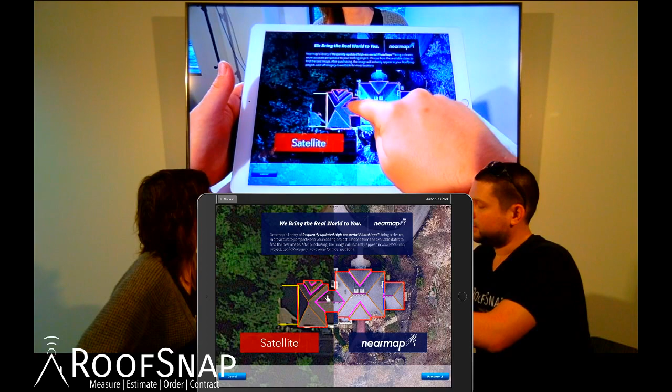But I want to draw your attention here: this on the left is from satellite imagery, this on the right is from Nearmap. When we draw from satellite imagery, sometimes we have difficulty seeing the edges — you can see the distortion here because the lines aren't straight, since the roof wasn't captured from directly overhead. Whereas in Nearmap, it's nice and straight over here on the right. It's a much easier roof from which to make accurate measurements.

For sure. So let's go ahead and commit to a $5 purchase for the Nearmap. I think that's worth it.

And Katrina, you'll have to project today because we're not as close to the microphone as we typically are.

I'm a little more soft-spoken. You have to give it the... you know what I'm talking about, right from the diaphragm. Horrible. Yeah, yep. Oh, I know. I don't know if anybody's gonna get that.

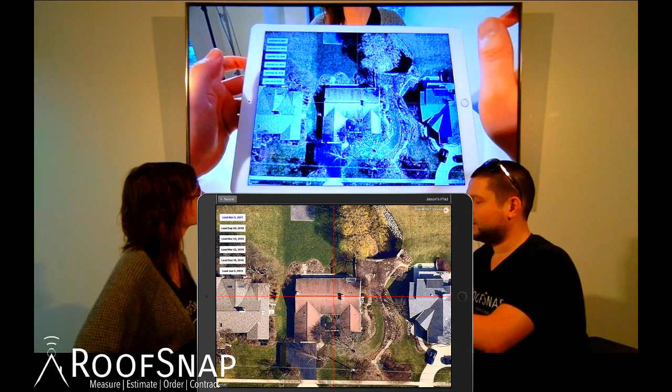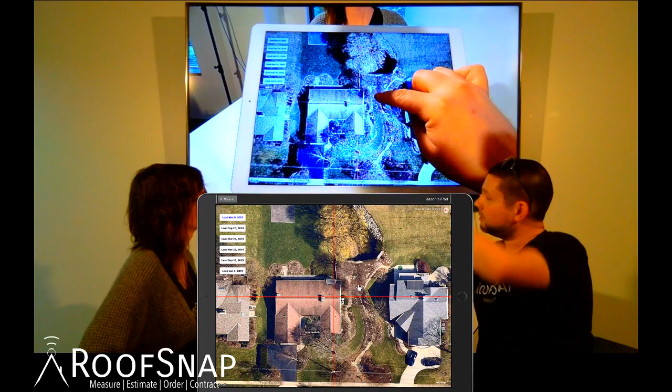So we had success in purchasing the Nearmap image. Now we can make sure we're zoomed in all the way and get nice and straight on the ridge. But this image, if I line it up here on that up and down red line, which may or may not be visible on the flat screen, but you should be able to see it there on that screen down there. I'm going to have to get used to this.

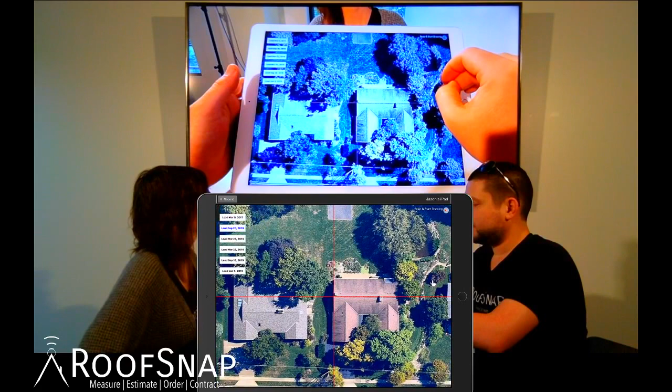Let's change and load in the September 20th image and see how that one appears. The goal here is not to see the siding on the wall there. You want to see the rakes being straight. You notice here that the rakes are pretty straight. We don't have that curvature, which tells us it's more directly overhead. But we still have trees covering this area on the back and some strong shadows.

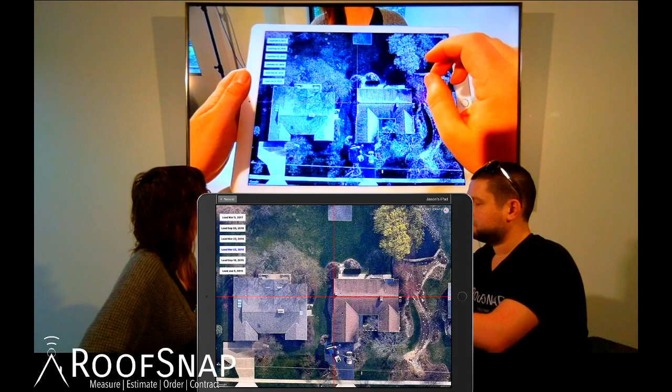So let's go to March 23rd, and that is a much clearer image. The rakes are very close to straight, which is going to give us the most accuracy. If the rakes aren't perfect, it's okay, we can still use it to draw. We just want the best of the best, the best image possible. And that's what you get with Nearmap.

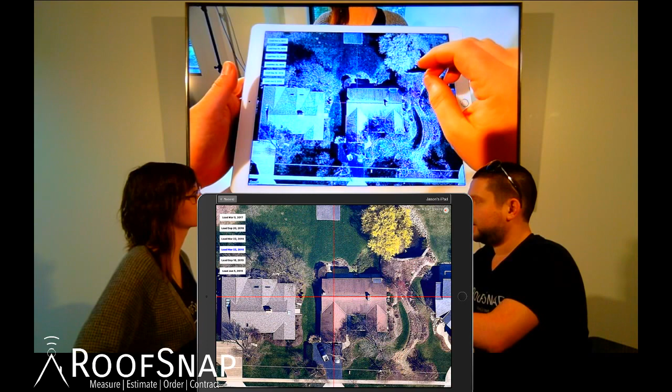Options to find the best, and I like this one so much, I don't even think I'm going to spend time looking for a better image. But you notice here, I'm lining up my horizontal line on the ridge and my vertical line on the other ridge, making it nice and straight, bringing it back to center.

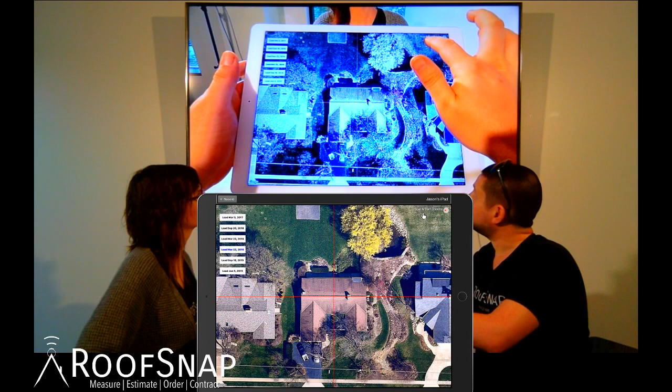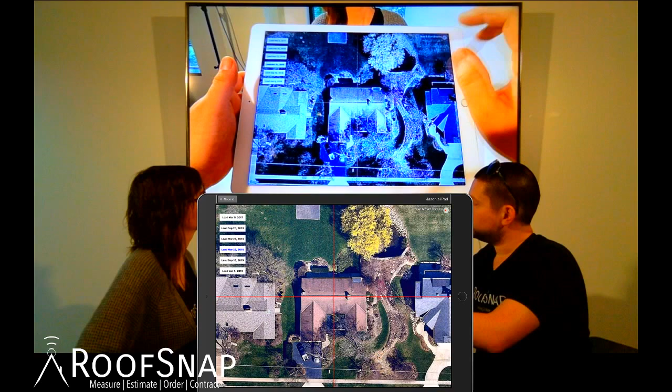Two fingers to zoom in all the way, which I already am. Snap and start drawing. Tap on that in the upper right hand corner, and for this section let's just bring it down a little bit. Still bright, still really bright. Go ahead and tap on snap and start drawing and then continue. And what this does is it loads up that image directly into our sketching functionality.

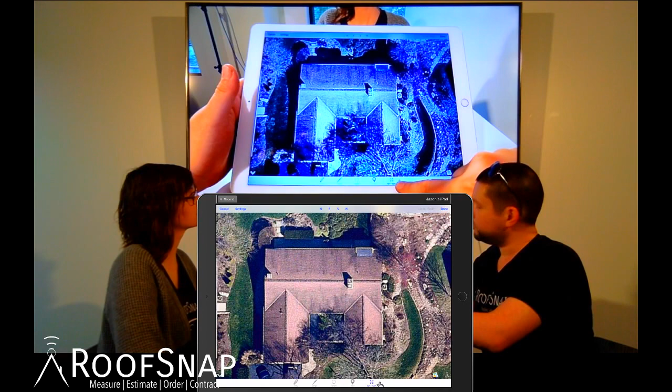Our sketch tools all appear here along the bottom of the screen: draw, edges, facets, pins, and pan and zoom. You'll find that I tap on pan and zoom a lot just to move the image around on the screen. Kind of like to be zoomed in, it's easier to draw more accurately.

To lay down my first line, I'm going to tap on the draw button here on the far left. I'm right-handed, so I'm going to use my index finger here on the screen. When I touch the screen, it puts a cursor on the screen. So I'm going to come over here and put my cursor right in the corner, and then with this little thumb right here, I'm just going to tap right on the screen, like a mouse click. It turns my cursor green, and then I can draw out my first line.

I'm actually going to draw that one to about there, and you'll see why. I actually drew the line, and then I tapped on the screen when I reached the end. Now I don't need that little line I just drew, that was just for an example, so let's tap the undo button here.

Now let's move this over with the pan and zoom down here in the bottom right toolbar. Switch back to draw, put my finger where that point is, and then in order to start my next line I have to tap. So there you see I tapped on the screen. Bring the line up, and I want to end the line there, so I tap on the screen again. And now I've drawn two lines.

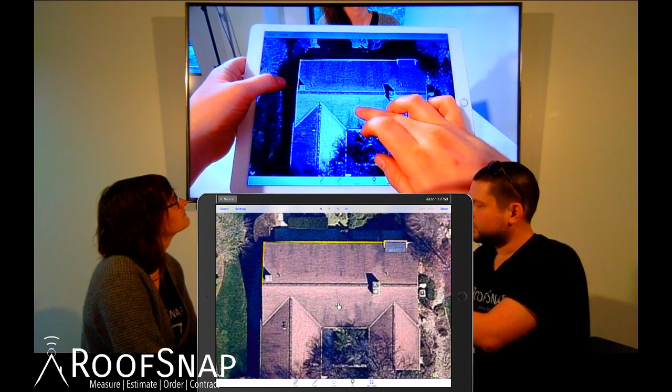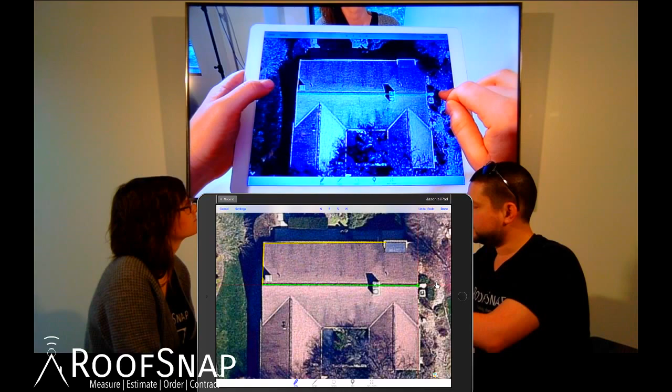Now we don't have to stop after every single line, so let me draw a few lines in a row. First of all, let's draw out that ridge line. I'm going to bring it to the end, and I am going to tap on the screen there.

Now let's draw three lines in a row. I'm going to start right here, tap to start, come down right to where the bottom of the valley is, tap to set that line, and then come up the valley. I didn't pick up my finger at all, I just continued to draw. Tap again to come down the other valley, right to about the center of the gutters.

That's what I find to be the most accurate. So we drew those 3 lines. Now we can pan and zoom and move it around. You see I just touched it - I do it sometimes so quickly, even with other fingers. It's a multi-gesture environment here.

So now let's put our finger right up here to set the cursor at the top, where these 2 valleys meet this ridge, and come down the ridge. Jason, when he's drawing a line and starting his cursor out, he kind of quick taps to connect to that point. He's already landed there, and he'll just kind of tap and turn. I'm going to tap and turn, and I don't pick up my drawing finger. Now we see this one goes past.

There's a funny little detail here. You can see this when you're on site more easily than from an overhead image. But for any of you who've drawn as many roofs as I have, whether on graph paper or in some software, you know this has a little overhang and a little piece of flashing there. It kind of comes into a little pocket, so we'll connect it into that pocket with a line. Straighten this one out - that's something we haven't talked about yet.

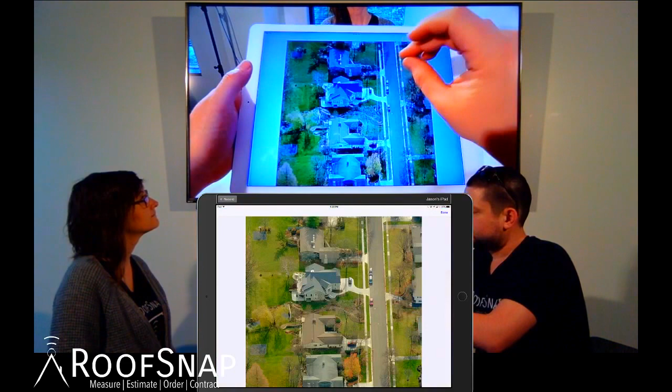There's the house. We're going to have to be on a lookout for this little flat section back here - do you see that? Yeah, interesting. East. South - there's another view of it there. Here we're also looking for any sort of bay windows or other difficult to see, wraparound, small sections, stuff like that - things from a bird's eye view that you can't necessarily pick up straight from that aerial view.

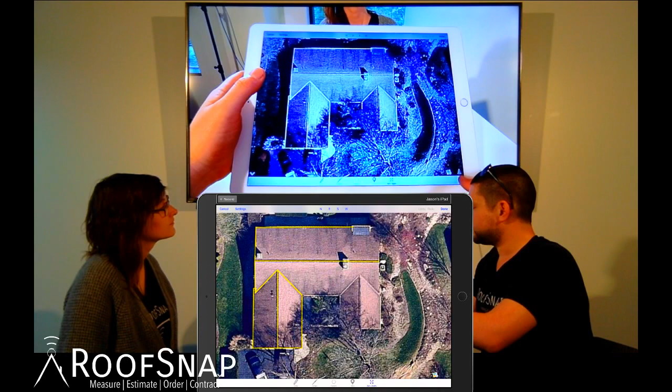We've looked through those. Now let me draw your attention down here to the bottom right corner. I want you to see there's a little map icon and a little man with a circle around his feet. Let's start with the little man with the circle around his feet - that's going to open up Google Street View imagery.

Yeah, I think it's that one, with the tree right in the front. But good news is there's straight gables on the front of the house - no special little wings or ears. We have a pretty straight on image. You guys notice how I've gotten the gable pretty much straight.

If I put it right in the middle of the screen, it feels like it's a little at an angle, right? A little crooked. If I move it over here, it feels like it's pretty straight, just off center. Notice this little icon up here in the upper left-hand corner - this is a little pitch card. Let's tap on that and tap on continue.

Now I'm going to take two fingers, and here's where it's interesting to be able to see my hands - I'm going to just take it and pinch it open, making it a little bigger. Once I've changed the size of it, now with one finger I can move this card around. I can put the 4/12 right on the roof, and that looks like it's going to be a 4/12. The 5/12 is too steep, so that's good to know. We've got a 4/12 pitch, at least on that section of the roof.

We can also move over a little bit.

Move over again. Oh, too far. So we're not going to be able to get as straight on this one over here on the right.

If you're at an angle and you're using the pitch tool, same thing, zoom it in a little bit and bring it down. It's pretty much right on 4/12 still. Even though we are at a slight angle, it's still showing us an accurate measurement there.

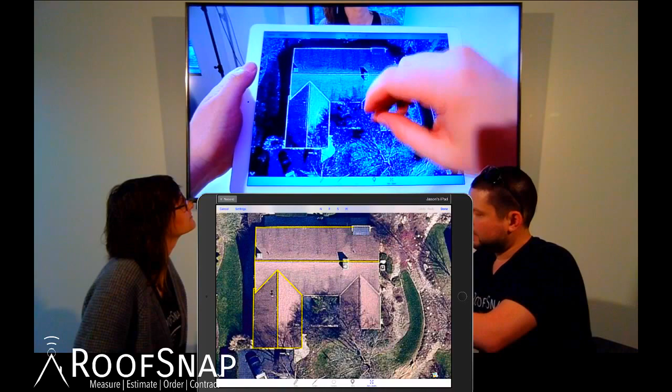All right, let's close out of Street View. Now I can draw the rest of the lines, but let's not forget, we know the pitches on these front sections. Now we'll finish drawing out the rest of these lines on the roof. Same deal here, every time I come to the start of a line or draw a consecutive line, I've got to tap on the screen.

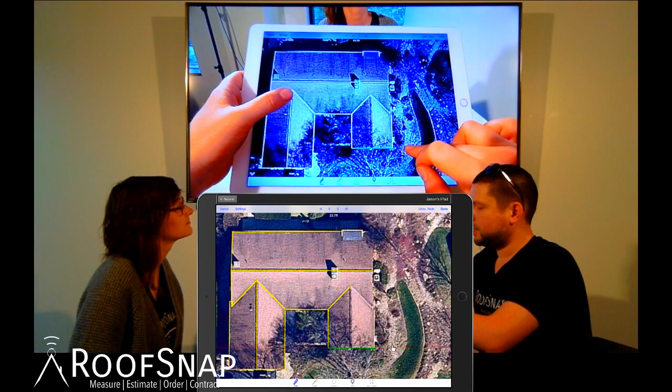Let me show you guys what not to do. A lot of people want to come down to the bottom of an eave, and then when they want to go across a rake, they'll draw all the way across the rake. Now if I do that, I have no place here to connect my ridge. If I go all the way across, I will not have an accurate drawing, and I will not close in my facets correctly. So what I want to do is just go halfway.

Use my cursor tail to know where the line's going to go up the roof. Make sure it's straight, tap, change direction. Haven't taken my drawing finger off in three lines now. Even going to come down this side, still haven't taken my finger off the line. Now I can make sure that this is level by using my horizontal cursor tail and seeing that it's equal to that gutter in the middle section there.

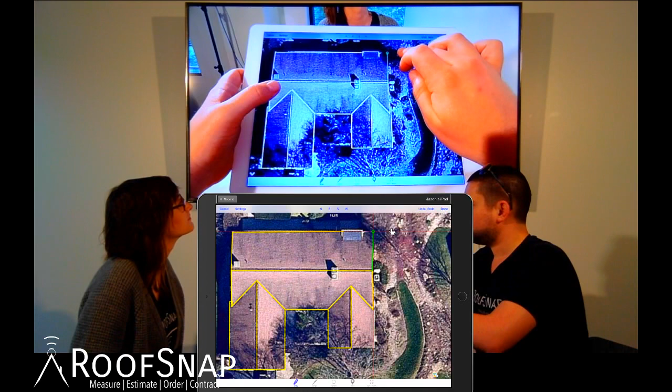Tap and come up. Now here I'm going to tap and keep going and draw another line out here. But I'm going to stop here and zoom in. I don't want to try to draw this section without zooming in a little further. Might as well just go ahead and take care of this while I'm here.

Sounds good. So we come down the rake, tap, don't forget to tap. What happens if you don't tap and you lift your finger up? Oh, you lose your line. Yeah, let's do it again.

So here, if I just draw and I think I'm there, but I forget to tap and I take my finger off the screen, it's going to stay there. See, fingers are off the screen, it's there. But as soon as I touch the screen again, that line disappears. You have to tap to lock it in, otherwise the line disappears.

The reason it stays there, I guess, is just to make sure the crosshairs are lined up with what you're doing. If you're just trying to set a point, just to see if something's level, you want the crosshair to stay there so you can see, and you take your hands out of the way. That's why we let the crosshairs stay up there on the screen when you take your finger off.

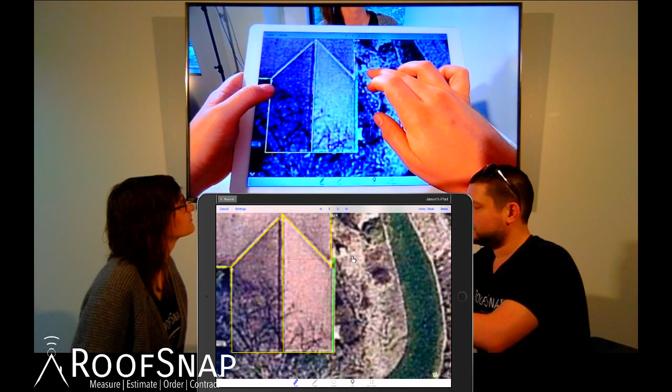So let's go ahead and draw it past, bring it over. I'm definitely going to want to zoom in on this section here, because again, we've got a little bit of overhang, a little bit of a pocket that comes down, and I'm going to connect it right there.

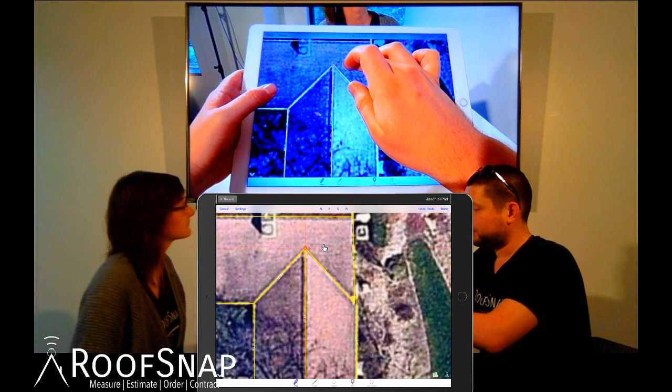Our roof measuring functionality is extremely accurate by actually just drawing the lines that are literally there on the roof. What I mean by that is you don't have to draw double lines to close in different areas. You don't have to draw the ridge twice, one for the front and once again for the back.

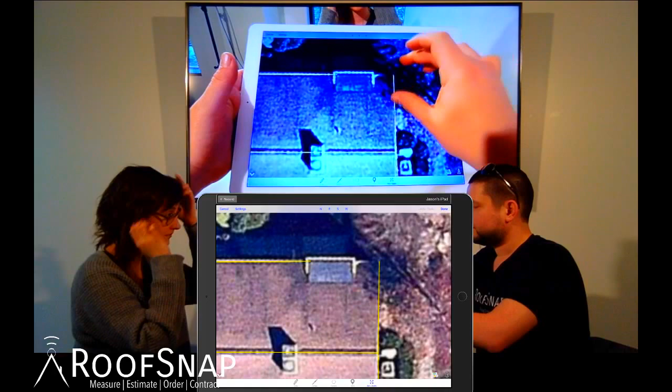So here, first line I am confident about is the pitch change from the regular slope to the low slope. I'm going to draw to the center of the gutter, come up here, come across the center of the front of the gutter, line up with my cursor tail to make sure it's nice and straight, come down, connect it. Now that I'm connected, I can tap, take my finger away.

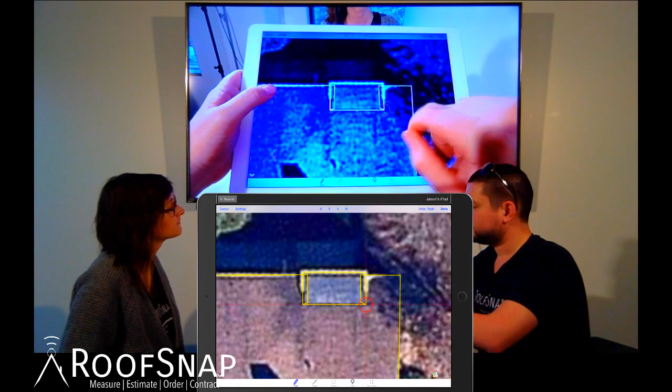Now let me show you guys something here. This is a lower section as there's an underhang.

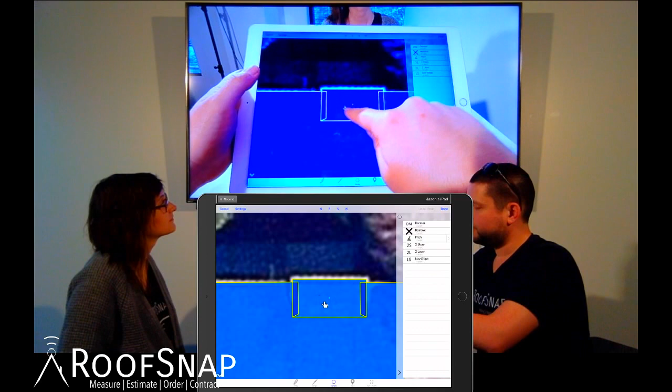This is a lower section here as there's an underhang, and a pitch change that goes from the big section down to the lower section. When I switch to facets, we're going to see the 0 for the smaller facet here, and these darker shaded areas represent material not only for above and for below.

But let's say this low slope section here is not getting any shingles. That's what we mean by low slope - it means alternative roofing system. You're not doing shingles, you're putting rubber on it or some other modified system. Label that as low slope. Maybe it has a 2 in 12 pitch, or maybe it has a 1 in 12 pitch.

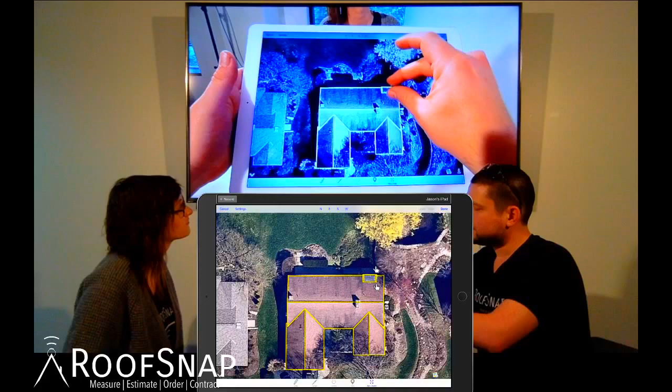Now let's do pitch, but let's do it in slow motion. So we addressed some of the facet labels, but pitch is a facet label. When we show the whole roof here, pan and zoom to go to the whole roof, and switch to facets, you'll see that everything starts with 0.

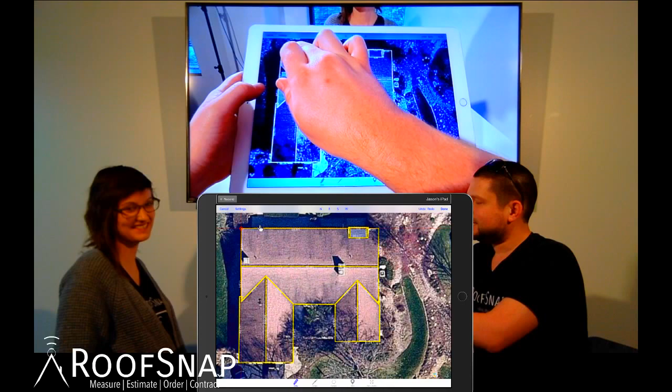And of course, while I'm in here, I see a line that's not ever so straight, so of course I have to fix it. It's my OCD or my ADD or my UDF. That's where I get gas, guys. I have a UDF card and an ADD card. Do you? I can't tell.

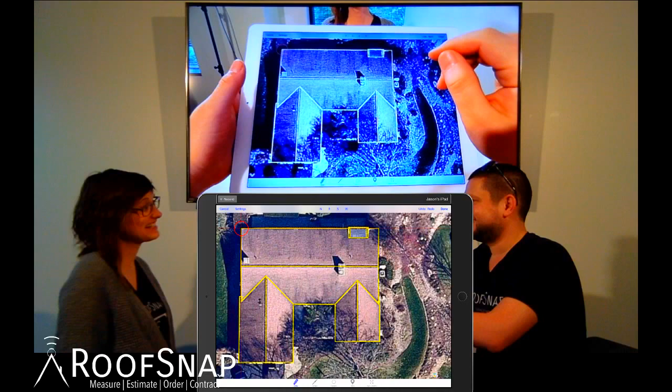Facets button - to look at facets, to change facets, tap on the facets button here at the bottom. And then go and tap on pitch. Select your pitch - pretty sure everything's going to be a 4 in 12. Tap on apply to all.

Put 4 in 12 on everything. Let's say these front areas were not 4 - let's say they were 5, but everything else was 4. Go back to pitch, select 5. Now just tap on the 4, it toggles it to 0, tap on it again, makes it 5. Touch on the other one, makes it 0. Touch on the other one again, makes it 5.

Want to remove a section that you're not changing the roof of? Use the remove button - you can turn off facets altogether. It can also show you that this 4 doesn't apply to this section here. How do we know? Let's remove it for a second, turn it off - well, that section's still highlighted. Tap on the little X that is left behind once, getting tap happy there.

If you've got a dormer on the roof, label both or all the facets of the dormer as dormer.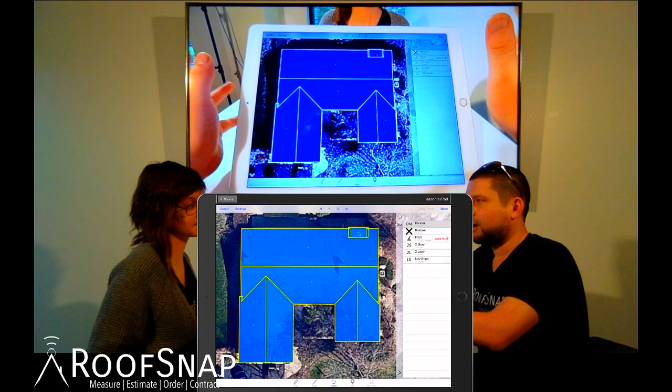If there's 2-story and you want to add that label so that your estimating platform within RoofSnap knows to charge extra for 2-story. Same thing with multiple layers - you can add 2 layer to any facet. Of course, you're not going to be able to do that from the office. You're going to have to add second story, or excuse me, multiple layer once you're on site and you've actually checked to see if there's multiple layers.

Every time I lean in too far, my face goes behind the other iPad, so I'm like, hey.

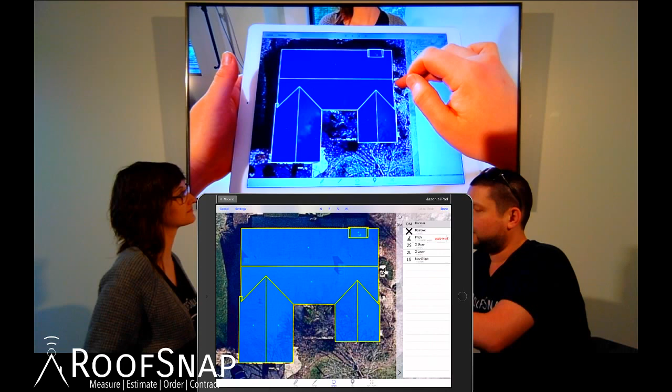All right, so that's pretty much got the facets taken care of. Now, one of the things that the software doesn't know yet are all the lengths of all the lines. Here's why - this is an eave, 21.3 feet. Not sure if you can see that it says 21.3. As soon as I change it to eave, it stays 21.3. Why does it not get any longer? There's no slope that it's going up or running down.

Couldn't have said it better. Won't even try to say it better.

Rakes, however, they don't travel horizontally. Rakes travel diagonally, they go up the slope. So this one here is 11.5. Right now it doesn't know that it's a rake, it just thinks that it's a line. As soon as we call it a rake - 12.4, this one's 11.2, 12.1. As soon as we touch it, it gets longer.

You have to label all your lines. If you don't label all your lines, you will not get accurate measurements, line measurements. You might come pretty close on squares, and so if all you need is squares, then you're good. But if you need to know how much starter, how much hip and ridge - hips, perfect example. Except that we don't have any hips on this roof. But valleys...

Valleys are very similar. Now let's touch on valleys the second time. So when we first tap on valley, it highlights it, loads it up here into this little sidebar. But if we tap on valleys a second time, you'll see we've got another label, sort of hidden, a sub-label underneath the valleys. We can add ice and water shield. When I tap on it, it highlighted it, ice and water shield. Now we're going to be accounting for ice and water shield in all those valleys.

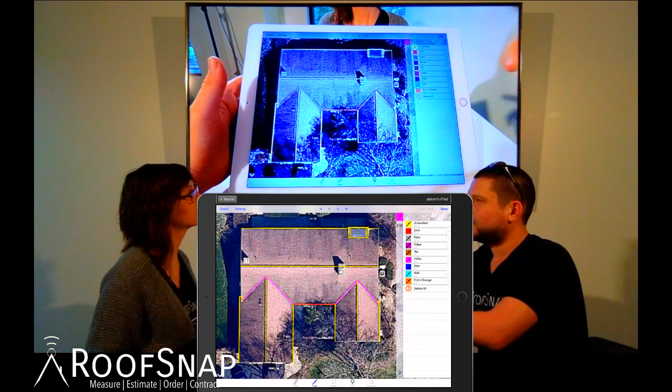But let's say we also needed ice and water shield at the eaves. Let's get a running total going. So let's go to eaves, go back. Let's add ice and water shield.

Let's also add eave edge. Eave edge is going to make a running total for things like starter, edge vent, and drip edge metal. It's not about one product, it's about a category measurement that gives measurements to lots of different products when we start estimating in RoofSnap. So I want all the eaves.

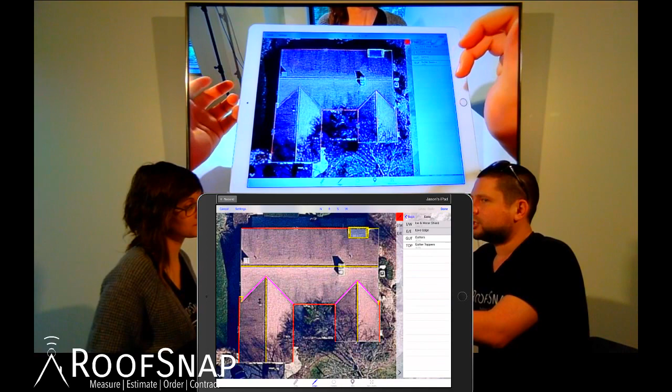Do I want the eave on that low slope section? Well, I ask myself, am I going to put ice and water shield along that low slope? No. Am I going to use the same style of metal flashing along that low slope section? Possibly not. I might be using like a D7 or some other heavier duty drip edge flashing along a low slope, something that correlates with a special edge to go up under the rubber. So let's not label that one as an eave, because it's not getting all the same measurement or the same products that all the other eaves are getting.

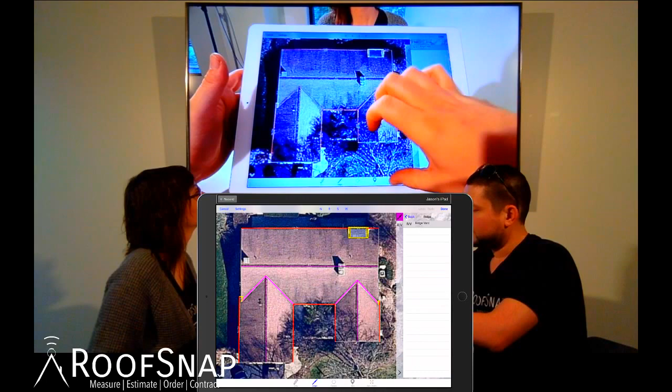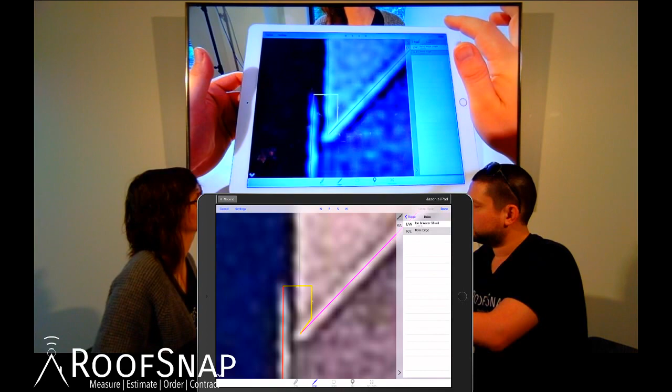Ridge, well, we do have one label, sub-label under ridge. It's called ridge vent. Let's tap on that, load it in, and zoom in on this little section here, because what do we have here? A rake. Do we put metal on our rakes? We didn't, we left those blank. Let's add it in.

And then there's going to be a little wall. So what do we have under wall? More ice and water shield and more apron flashing. So let's get some ice and water shield there. I like to throw on a lot of labels.

You notice here though on these two rakes on the front, I didn't put in rake edge, which means I didn't count for a measurement that's going to give me measurements for my drip edge along my rake. So I went ahead and tapped those, and you can see the little sub-label R/E showed up.

Can you see that? Yeah, I see it. All right, well, I'm hoping they can see it. That's why we have two screens going, above and below.

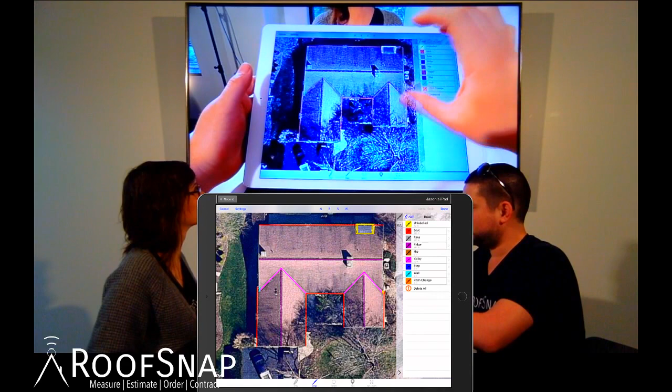Oh Katrina, I can see your neck. Hey! Lots of cameras running today, definitely not used to what I'm looking at, where I'm looking. I've got a rogue gnat, a rogue little fruit fly. That time of year, doesn't matter how many times they clean the office, we always have these little tiny baby fruit flies. Well, I don't know if they're babies, I imagine they don't live very long.

And since you've already selected ice and water shield and apron on your wall, go back. It's already there, it remembers. It's a nice little memory feature. I keep switching to pan and zoom a lot. Every time I switch to pan and zoom, it brings me back so I can come to a new location of the roof and really zoom in on it.

For some of you who put ice and water shield at pitch changes, that is an option. So we can tap and label, you see the word ice. Ice is going to appear wherever ice and water shield is being labeled. That doesn't mean you're limited to one ice and water shield product, though.

When you set up your account, you could have a generic version, you could have a GAF brand, you could have a TAMKO, you could have an Owens Corning. You could have 9 different ice and water shield products. This is just giving you the number of feet where it's going to be installed, just in case any of you were curious.

Step. We've got a little bit of step here, so let's tap on that. Let's add step flashing and ice and water shield.

Now, the same sort of problem applies here on these rakes. Do we label them rakes or do we not label them rakes? Well, it depends. Are we going to use the same type of flashing on this low slope section as we are for the rest of the roof? If we are, then yes, we would label them rakes. If we're not, we won't. So I'm going to leave those yellow for right now, since in a sense it's a separate roof installation altogether.

Some companies might even have a separate crew come the day before or the day after the rest of the roof is done and just lay the rubber for that last section, or the TPO, or whatever type of material is going on there. Some companies, however, have crews who will do all of it while they're there on site.

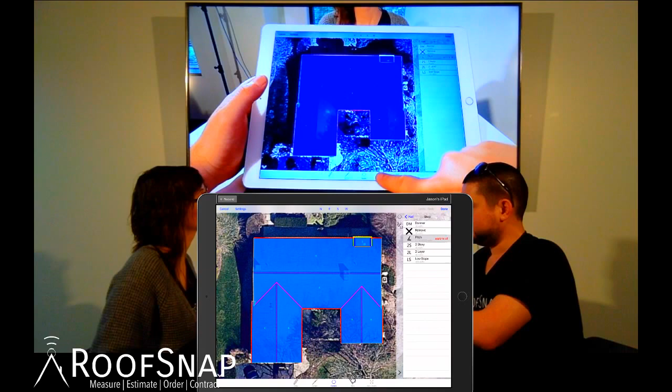All right, so we've got one more label down here, pins. Pins can come in handy if you're estimating, but they also come in handy when you're inspecting. And today, Katrina's going to get her picture taken. Oh great, we are going to make Katrina an attention area.

Better than hail damage. Better than leak area. Shingle defect? No, she's an attention area. All right, I'll do the attention area.

There's the attention area pin. You see what I did? I tapped on the attention area, and when I did that, it loaded it here into this little sidebar, and then I tapped right on the section of the roof where the attention area is going to be. Oh, I didn't tell them how to do that - sliding my drawer in and out. That's right, see guys, how I can just touch right on that little gray bar and I can move that drawer in and out. Okay, let's not get sidetracked.

So I've got the pin. Now I press and hold on the pin, and it says delete pin, so that's one option. Choose image from my photos library if I already have one uploaded, take photo - that's what I want to do - or edit note.

Well, let's edit the note first. I've got a keyboard here, so I can type. Katrina is great at demos. That's my note for Katrina for today.

Great, I don't have to hit a save button. I can just tap, makes it go away, but that information is there, and that information is going to come back to haunt us later on.

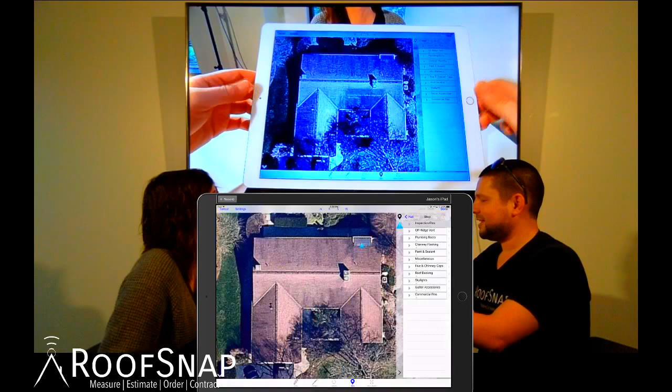Now let's grab some accessories that would also be good for estimating. Plumbing boots - let's tap on the 1 to 3, I see at least 2, maybe 3. If I was on site is when I would actually want to be doing this, confirm the size - maybe they're 4 to 5 inch, not 1 to 3. I'm making guesses here just for demo purposes. You're going to know because you're going to be on site.

Chimney flashing - let's get a large chimney flashing kit, and that looks like a chimney, and that might be a chimney as well. Paint and sealant, we could grab that and actually put 1 tube of NP1 and 1 can of spray paint on.

Miscellaneous - well, there's some cool stuff in here. Comb AC condenser fins, so if there's hail damage and we need it, there's an AC unit right there. Flue and chimney caps if we needed those. Now I'm showing you what we have here in the sample office, but just so you know, you can add lots of other accessories into your pins that can be labeled onto the roof. It's not limited to what we're seeing here, it's completely customizable through your account on the back end.

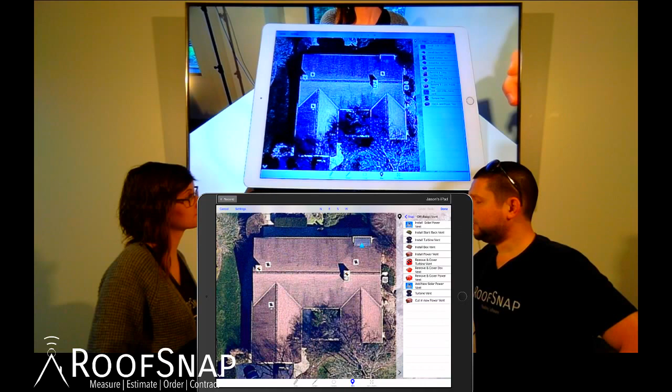We didn't look at off-ridge vents because this house obviously has ridge vent on it - you can tell just by seeing those raised ridges in this high-res Nearmap image. But if you needed to add a solar vent or some box vents, you could pin those on as well.

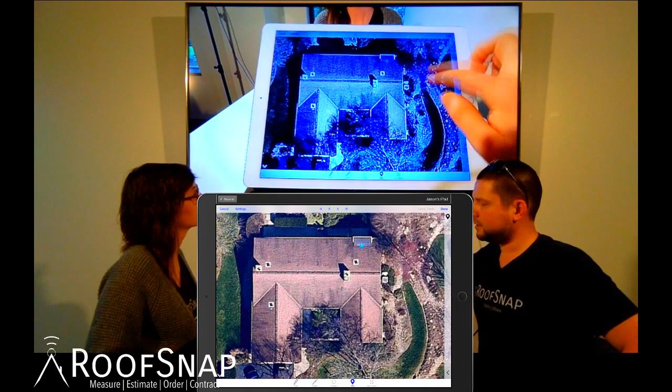And every pin, just like the attention area pin, if I press and hold on it - there's the AC one - you can choose an image or edit notes. I won't do that right now, but I'll go back to pins. Just make sure I didn't tap on the screen, sometimes I'll tap by accident and drop a pin I didn't mean to drop, and I just take a final look. Looks good. Back to facets, double check, looks good. We're done. All right, tap on the done button.

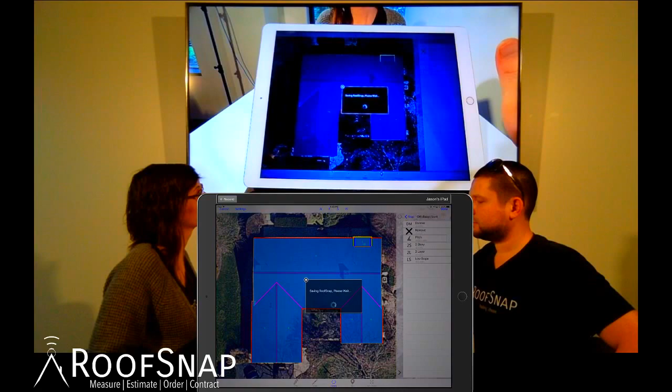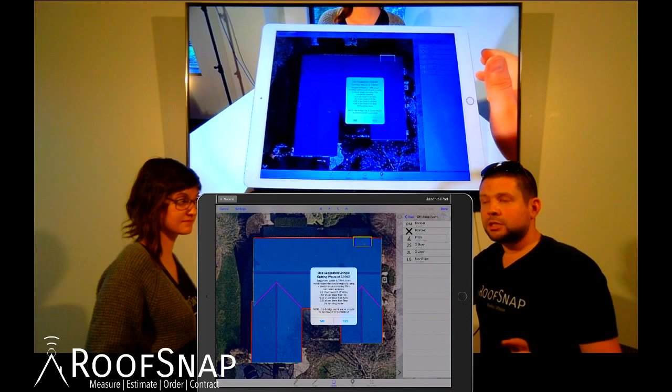Use suggested shingle cutting waste of 7.99%. If you're running a tight job and don't want extra product delivered that the crew might not stock back in, we find these waste percentages to be very accurate for production purposes.

If you tap on yes, we immediately go to the measurements tab and tap on it. The 7.99% waste factor has been accepted, and we're getting a total squares based on 7.99.

But for estimating, maybe you want it to be 10 or 12 or 15 or whatever. It's totally up to you. You can manually change your waste percentage. Again, no save button—whatever you put in there is what it's going to keep.

Notice we have the low sloped area. It's separate, it's a half a square, and it's totally on its own. It's not being calculated into the total squares or into the actual squares. If you scroll down through here, you can review some of your other measurements, but this isn't the best way to capture and hold on to those measurements.

You might want to generate a document, send a PDF. Maybe you're already used to dealing with measurements as a PDF report. We can do that by going down to Documents. As soon as you're in Documents, go to Sketch Report. Tap on Generate New and give it a few seconds to generate that PDF.

It's pulling in all that info we just laid out in RoofSnap. Now we have sketchreport.pdf. This is the document you want. Go ahead and tap on it. Don't be afraid to tap on anything in RoofSnap.

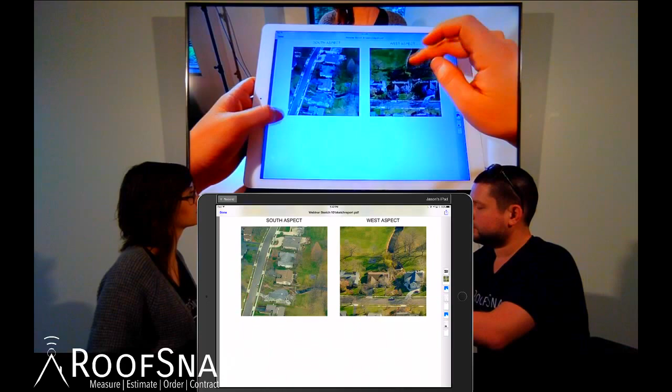There's always a done button or a back button, right? So what we're seeing is the information from the project: the address, the contact, which would be the salesman—which is me for our demo office—that primary image, the northeast and southwest images from Bing, a breakdown of each facet by pitch, including that low slope label that we see there, all the measurements, all the labels, ridge vent, ice and water shield.

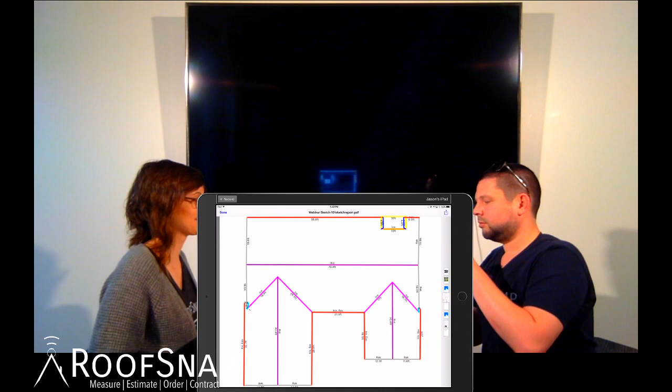Darn you, GoPro. You must have like a 20-minute limit before you shut down. It's got to be some kind of setting on there. Yeah, have Jeremy take a look at that. Well, we're back up and running.

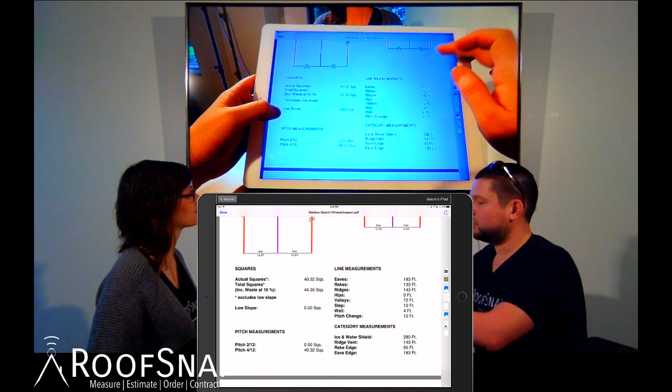So as we continue through the report, you see that we have total category amounts—actual squares versus total squares, including that 10% waste. It does not include the low slope; that's separate at a half a square. Pitch breakdown, line measurements, category measurements, everything.

If we had put in gutters, gutter guard, and downspouts as well, we'd see all those measurements show up on this document too. But more than just the measurements, because a lot of people need a good inspection report with photos and notes. So we continue down, we'll see.

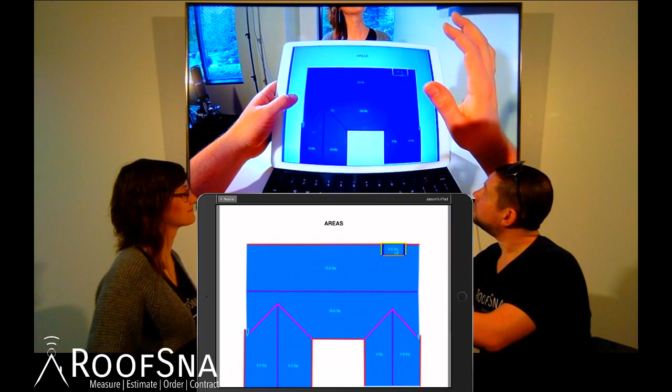It's just chirping at you. No, it just totally changed to like some super wide angle. Oh, yeah, it did. All right, well I guess we're going to be wide angle for the rest of the demo today. Very strange, that's bizarre. Oh well, my hands look really...

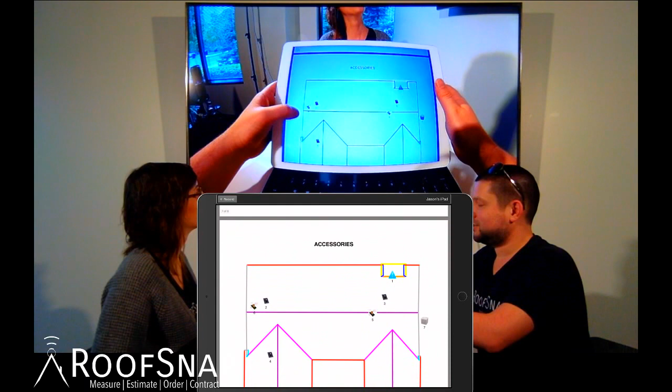Point being, we have accessories—all those pins that we put and the location. This is going to be great for the crews to be able to see, hey, here's where you're going to put that solar vent, here's where that AC unit is, so they don't have to walk around the house five times to find it. And then all the photos—Katrina is great at demos—and the plumbing boots, the chimney flashing kits, the comb AC condenser fins, all those.

Notice here on the screen, right at the top, there's this little share button, this little box with the arrow pointing up out of it. I'm going to tap on that.

We get this little share window. This is unique to iOS. From here, we can AirDrop it, email it, send it as a message. I've sent them successfully as text messages before. Yep, Gmail, email, Google Drive, company Dropbox, what have you. So that's how you take that PDF and send it somewhere else from your iPad.

I'm going to tap on the done button, close that out, and well, we're 45 minutes in. We have successfully measured a roof step by step. That's measurement 101. Generated a report here.